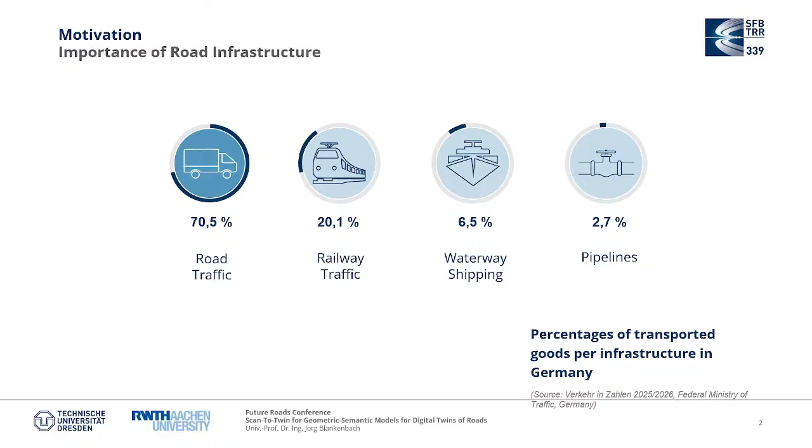transport. And what you can clearly see is that the road outperforms all other modes, railways and waterways, by far for the transport of goods. And that's very important because roads are the backbone of the economy, because the transport of goods is very important for the economy. However, also roads are very important.

They face some challenges. First of all, we have an increase of traffic year by year, causing traffic jams, for example. Also, we have an increasing load, so the vehicles become heavier. This impacts the condition of the road, of course. That means the durability is a problem. Roads are prone to recurring damages. And of course, repairing these damages, maintaining roads needs a lot of resources that are limited and should be used in an efficient way.

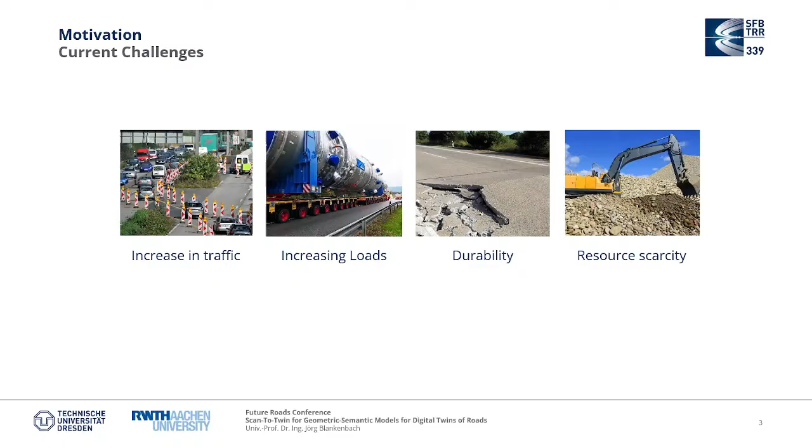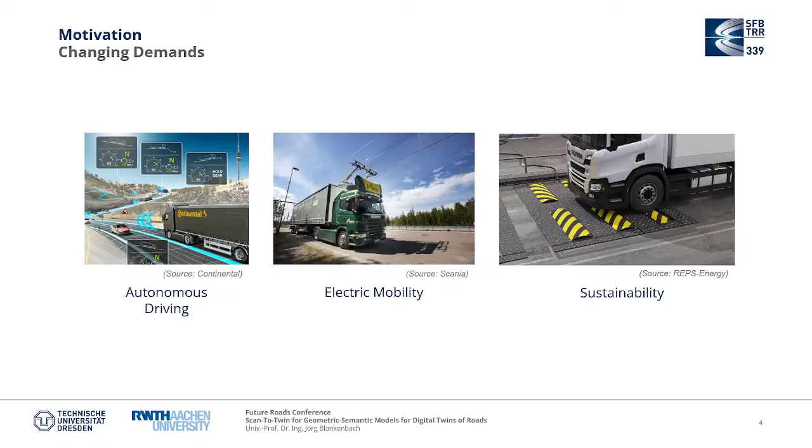However, besides these, let's say, traditional challenges of roads, we have also some new demands. Roads should support autonomous driving, electric mobility in future. And of course, roads should also contribute to sustainability, for example, to energy production.

And this finally leads to the question, how can roads meet all these challenges and future demands and at the same time continue to fulfill their essential role? And our answer to this question is a consequent digitalization of the road systems following the concept of digital twins. Before I go into details, let me first define what we mean by digital twin. We heard already we shouldn't talk too much about digital twins and define what it is.

However, as you know, when it comes to digital twins, there is a different understanding among people of what a digital twin really is. And in our case, I use an official definition, again from the Federal Ministry of Transport in Germany. And it says a digital twin is a virtual representation of the real world system, in our case, the road system. But what's very important, it's a dynamic representation. So it changes over time because the real road also changes over time.

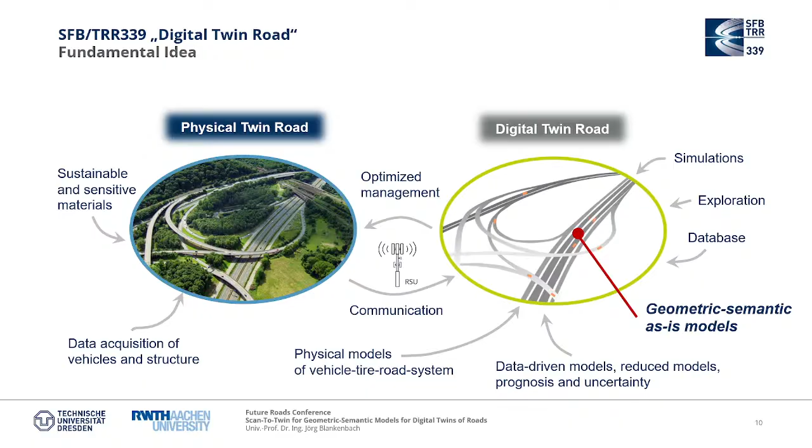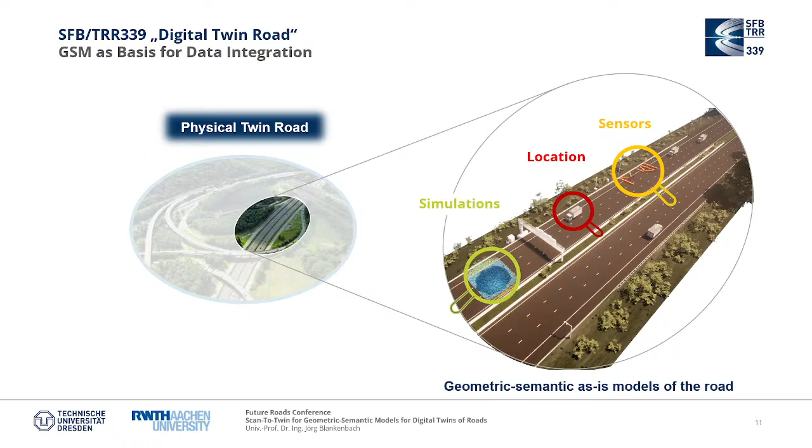One of these models I would like to highlight now, because we think this is a key foundation of a digital twin. This is a geometric-semantic as-is model. Why is this the case? First of all, such a geometric-semantic as-is model is an information model. So we are able to store a lot of information about the geometry, topology, semantics, as well as alphanumeric attributes. But coming back to my definition, it's also very important to integrate further data. So it allows to integrate sensors and sensor data, as well as location-dependent data, like, for example, the position of vehicles. And it's also able to visualize, for example, the results of numerical simulations.

And let me go into a little bit more detail about that. I will start with how to create such a model. And maybe Peter likes this slide, because I know Trimble is also manufacturing some of the technologies seen there, because a digital twin has to be a virtual representation of a real system. And that means it also has to represent the as-is condition of the system. And how do we get the as-is condition? We can use modern reality capturing technologies like laser scanning, drones, or mobile mapping systems, rather than using design data, for example, like plan models or something like that.

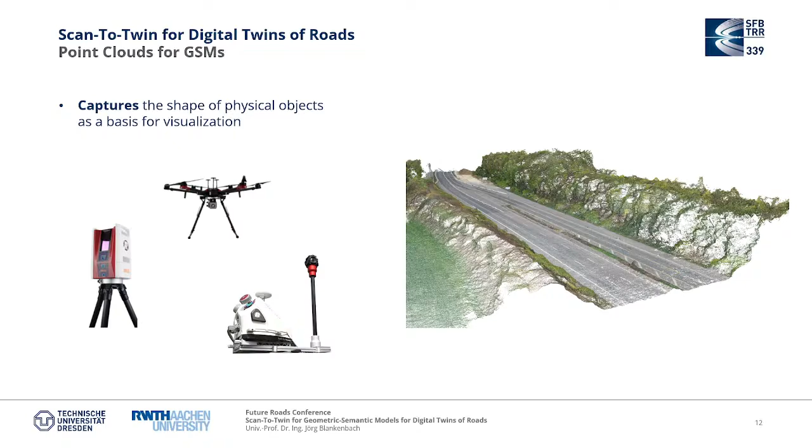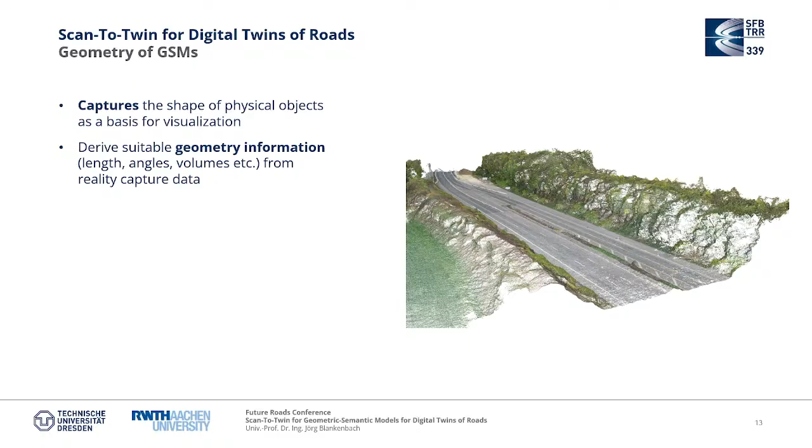And as a result, we have such a high-resolution 3D point cloud, which we can use for visualization purposes, of course. However, these point clouds also include a lot of information, explicitly the geometric information. You can get from these point clouds the shape, the dimension of the road, can measure lengths, angles, volumes, and so on. However, what's also in these models, implicitly, if you look at this point cloud, you can clearly see the roads, road markings, the vegetation, and so on. That means these point clouds also include semantics.

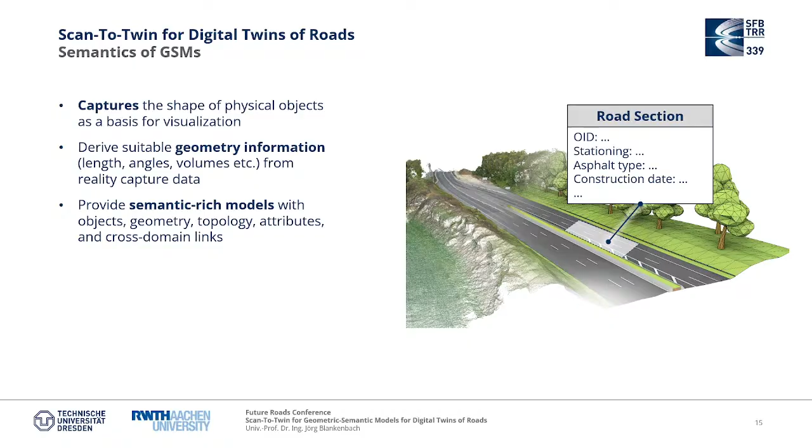And that means what we can do using these point clouds is to create classes and assign to these classes attributes and store, besides the geometry, also some alphanumeric data. And furthermore, and this is very important, you can now use the semantics to connect the classes to further data. For example, to external databases, damage databases, and you can just use the semantics linking the objects to other databases. So it's really the basis for semantic linking.

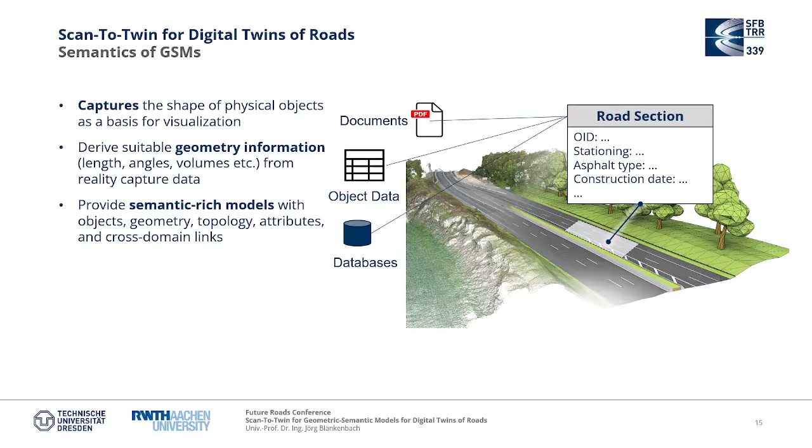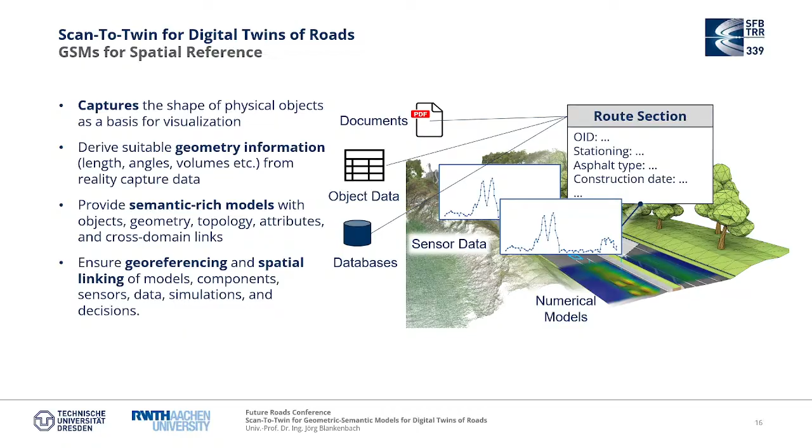However, coming back to the point clouds, the value of the point clouds goes beyond just having geometry and semantics, because point clouds usually are captured in a georeferenced way. And that means the point cloud itself inherits a geospatial reference system, and also the models derived from these point clouds inherit this geospatial reference system. And that makes it possible to also link other data in a spatial way. That means, for example, sensor data or the results of numerical models can be linked to this model just by the location, by the spatial reference.

Okay, I hope this sounds reasonable so far. But the question is now, what do we research? Because deriving such models from point clouds is feasible. However, in practice, the problem is that this is a very cumbersome task, and you need many manual steps to create such models, which makes it costly and time consuming.

So the question is, how can we automate this process? And this is exactly what we are going to research, automating this process. And we call it scan-to-twin. You all know maybe the term scan-to-BIM, and now we call it scan-to-twin because it's more or less the same. However, there are some differences. I will come to that later.

So let me briefly introduce what we do in research. First, we structured the whole process to create such a model, and this results in a multi-step pipeline starting from data capturing, as already shown. The second step then is the semantic segmentation. That means we assign a semantic class to each of the points. Then in the third step, we try to extract the geometry, for example, the center lines, the axis of the road, and both together, semantics and geometry, are then used for creating the model.

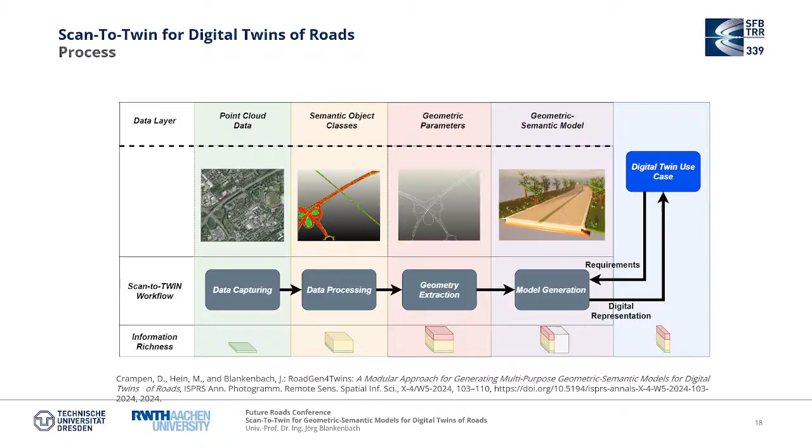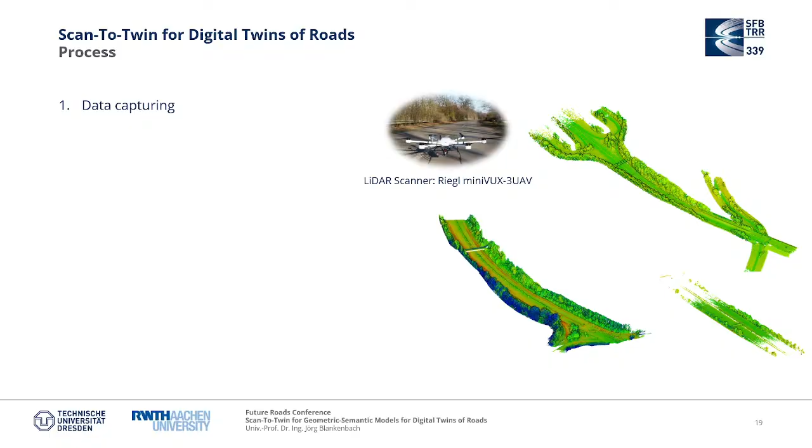Let me give you some more details or impressions from this multi-step pipeline, starting with the data capturing I already mentioned. Therefore, you can use modern reality capturing technologies that emerged in the past years. We, for example, use LiDAR scanners besides airborne laser scanning data, and these drones equipped with a LiDAR scanner enable us to capture data from the roads very efficiently. And as a result, we have such point clouds like shown here, high resolution point clouds that can be used for the next step.

And in the next step then, it's about the semantic segmentation. As you can see, now the point cloud becomes colored. That means in this step, each point is assigned to a semantic class, and therefore we have developed some algorithms, a coarse-grained and a fine-grained semantic segmentation using also AI to assign these classes to each point.

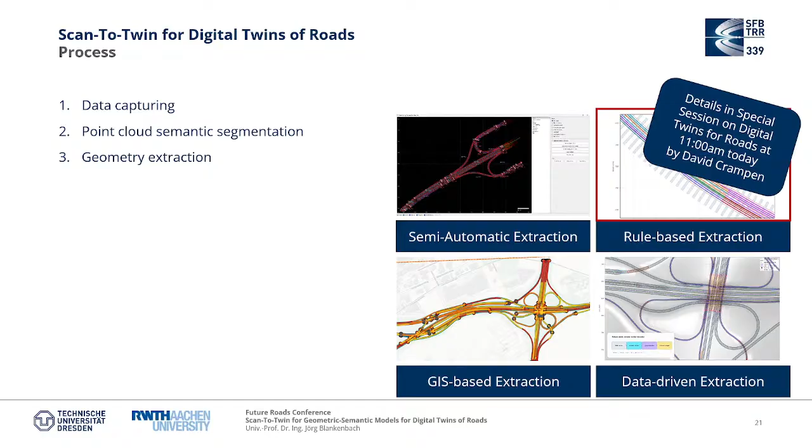Third step, then the geometry extraction. We also developed different approaches, different methods and algorithms for doing so, from semi-automatic extraction to data-driven, and we compared them, of course. But in this case, I don't want to go into much detail because we will have a presentation in the next session. It's a special session on digital twins given by David Crampen, and he will explain especially how this rule-based geometry extraction works.

Okay, and then finally, creation of the model. And as I already mentioned, it's very important to consider the use case. And therefore, on the left-hand side, we developed a multi-LOD concept. That means we split up, or we distinguish between the geometry and the semantics. And for each, we have different granularities. And this allows us to create models at the end that have different levels of detail.

And this enables us to, it's not working well, but this enables us to support different use cases from micro scale to macro scale. That means from pavement monitoring, which is more or less on the material side, up to driving simulations, because all of these use cases have different requirements for the models themselves, and this can be described by this LOD concept.

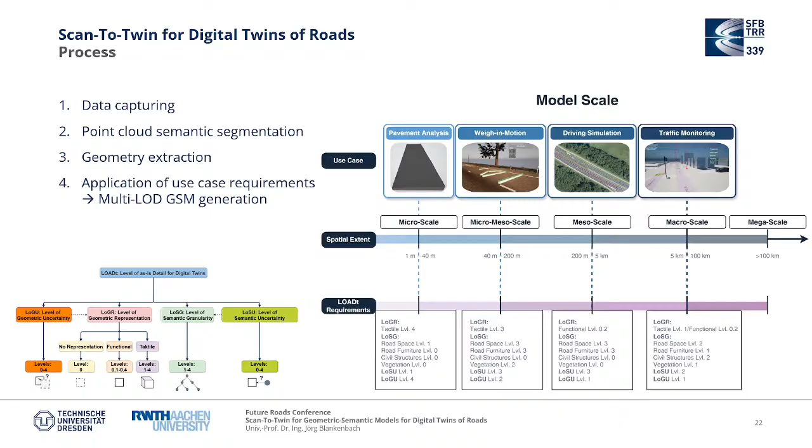Okay, I said it's a basic research project, that's true. However, for practice, it's also important that we can export these models in some standard formats or standard data models, like, for example, IFC from BIM, or CityGML from geospatial modeling, or Lanelet. And so we also investigate how we can export the models in these formats to really support different applications.

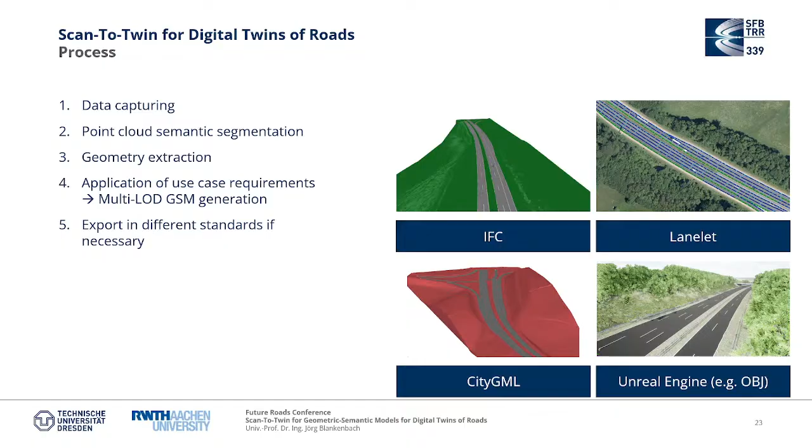Because to show that it really works, we prepared a so-called showcase. That means it shows how our geometric-semantic model can be used, besides other data, to support a specific use case. And in this case, it's a use case about pavement monitoring.

And we integrated data from further sub-projects, starting with vehicle data. We have one sub-project that uses data from vehicles, from dampers, from the tires, to sense the condition of the road, for example. We have also a project dealing with pavement data. So we have installed a weigh-in-motion system in a highway, giving us data about the loads of the vehicles. Then in the middle, you can see our GSM, our geometric-semantic model.

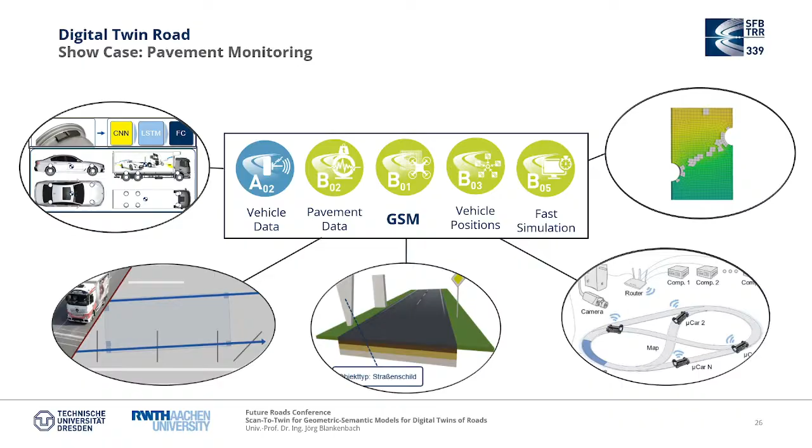Another project deals with vehicle position. So it's about tracking of vehicles and position estimation. All this data is also integrated. And last but not least, we have a couple of projects dealing with fast simulation, data-driven simulations, in order to do real-time simulation, in this case of the pavement response, based on the data from the vehicles and the geometry from the geometric-semantic model.

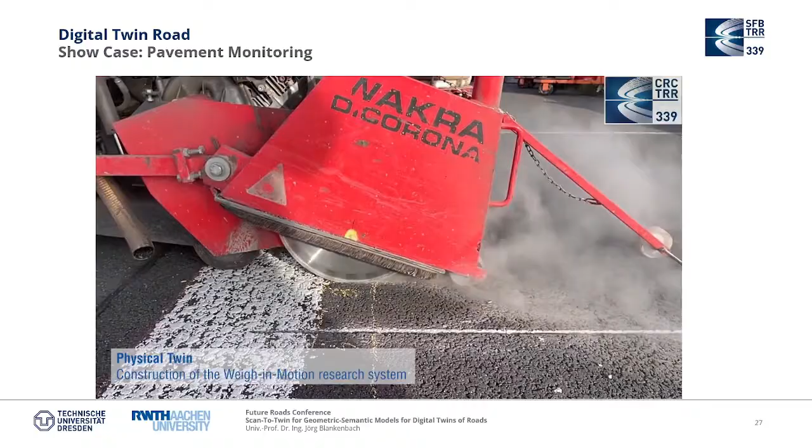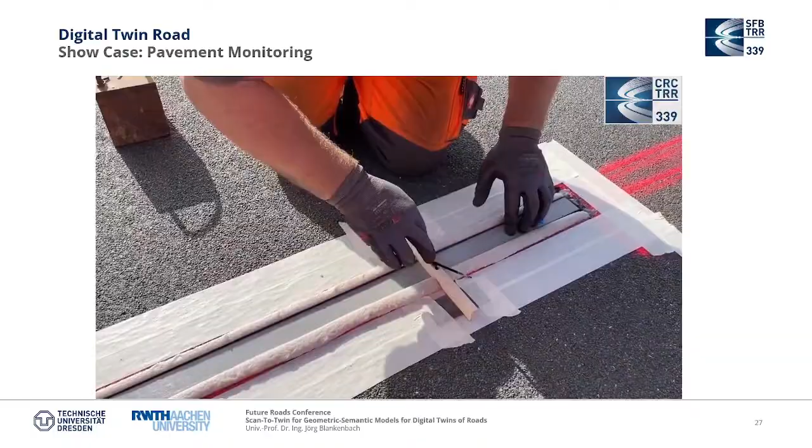Okay, and how this looks, we have prepared a small video showing what we have done so far. It starts with the physical side. As mentioned, we had the opportunity to install a weigh-in-motion system on a German highway. So here you can see how the system was installed. These are the sensor bars of this weigh-in-motion system.

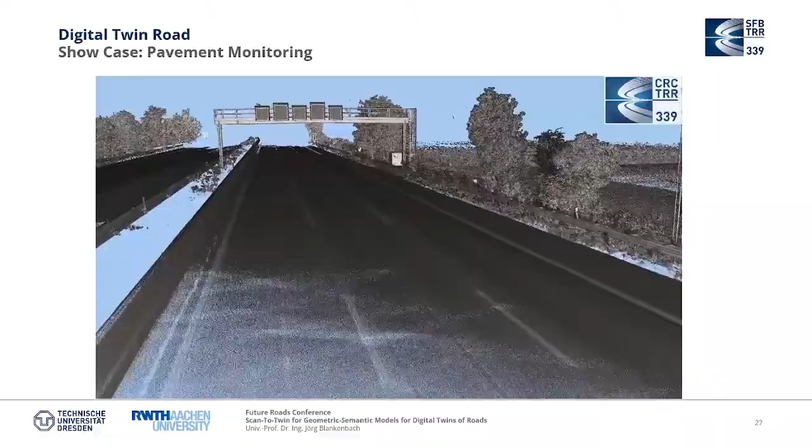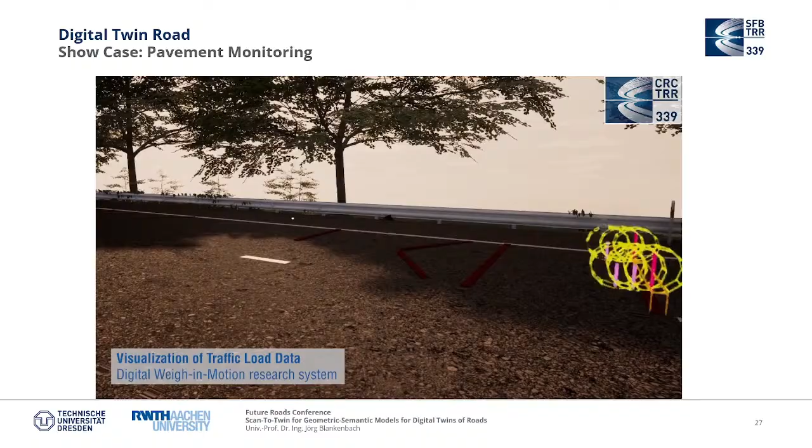We then also scanned the whole scene, this highway section, with a terrestrial laser scanner, and this 3D point cloud is then the basis for our geometric-semantic model. We also captured a lot of data. Of course, we captured first data with our weigh-in-motion system. Here you can see again the 10 sensor bars of the weigh-in-motion system on the German highway. And this is how it looks in the geometric-semantic model, the model itself, but also the sensor bars. And you can see the tires of the vehicles that are also modeled.

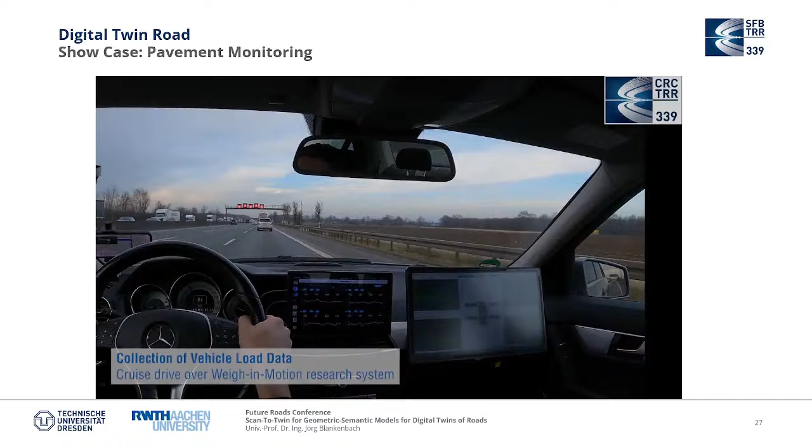And we also captured data by vehicles. So by these sensors of vehicles, you can see it's a Mercedes-Benz, so it's a German project, so a German car. It's quite clear. And we use this data also to get some information about the condition of the road. In this case, they drive the same highway section where we have the weigh-in-motion system installed.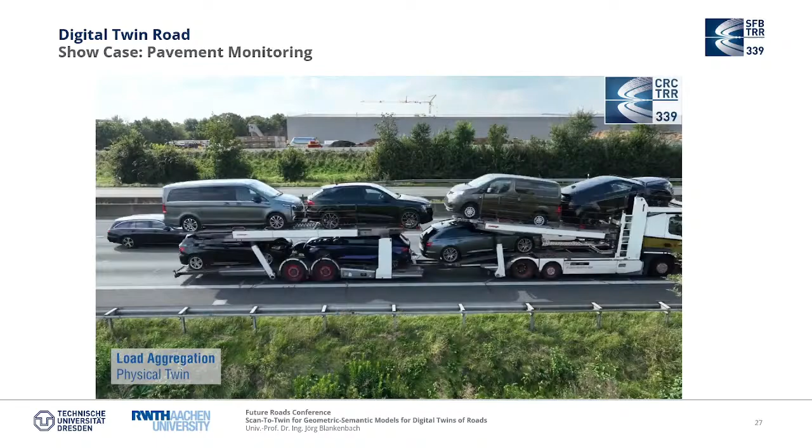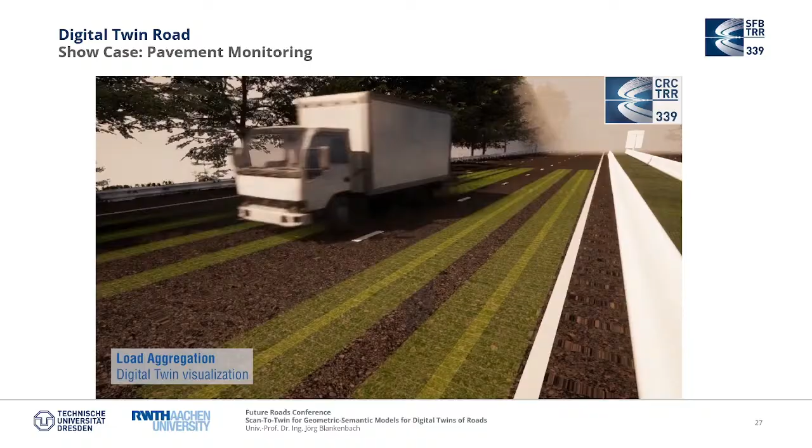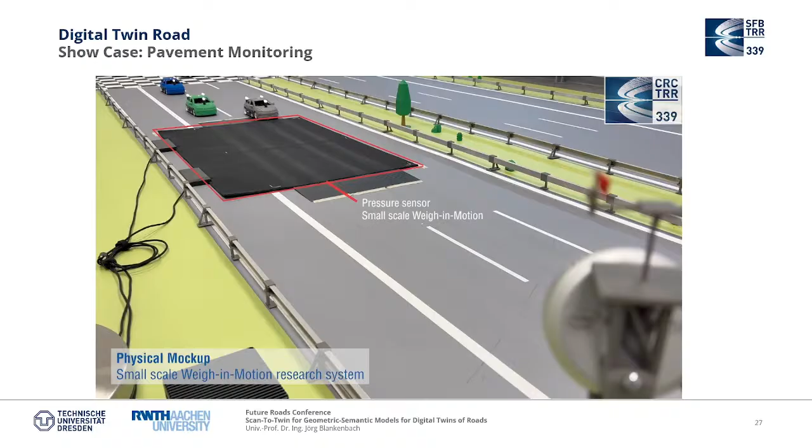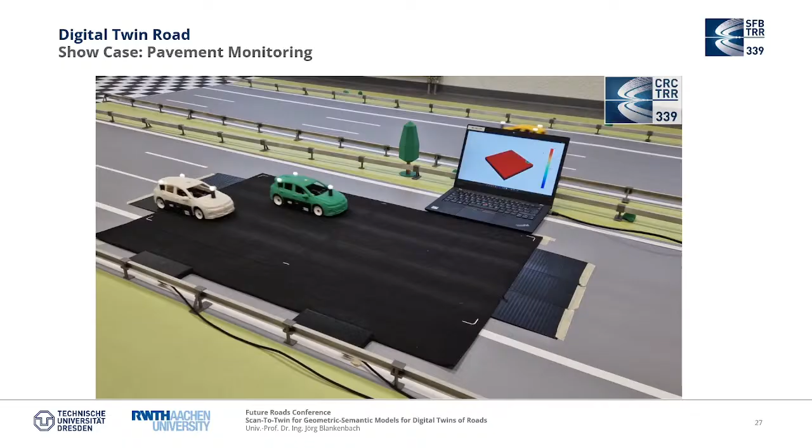What can we do with that data? Of course, we can first of all analyze the loads and create these load tracks of different vehicles, so you know what is the load at a specific point in the model. And to do better, we also created a kind of physical lab model of the same highway section. Here you see the small cars, and in the middle that black pattern, this is a pressure mat. So it's the same as the weigh-in-motion system in the real system, here in the model system, and it helps us to do more research on it.

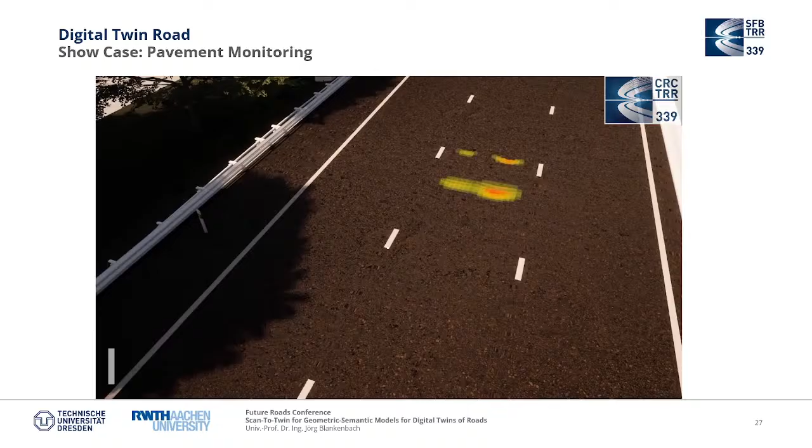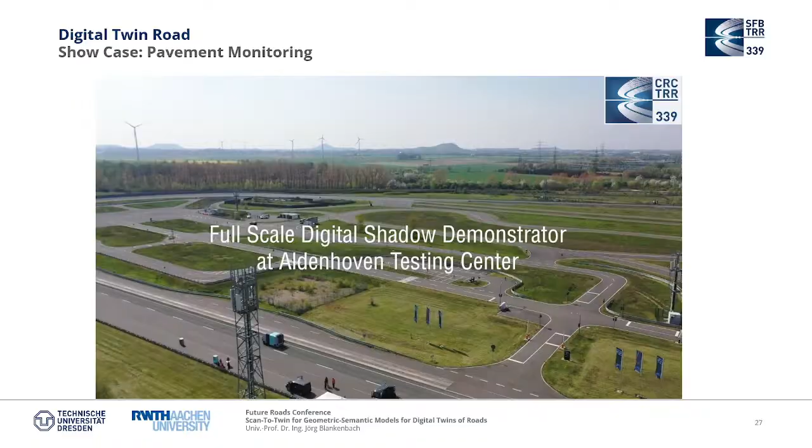And here you can see the vehicles and the position estimation. And this is very interesting what you see here. This is the result of a finite element model. It was a little bit quick, but I go on, because we have a surrogate model that simulates what is the impact, the deformation inside of the road based on the sensor data. And this is done in real time and can be depicted based on the roads.

And at the end, what you could see, we do it now more or less in the lab or on this highway section, but in the next phase, the goal is to do this also on a test track near Aachen, the Aldenhoven Testing Center, and we'll prepare a whole track, a whole road with different sensors for going on to develop our digital twin.

Okay, so I hope I'm in time more or less. Because I come to the end of my presentation, I hope I could demonstrate what we do in our project and especially what is the role of such geometric-semantic as-is models. And with that, thank you for your attention.

So now we have time for the questions. Who has questions?

Thanks for the amazing talk. I was wondering, with the different levels of detail, you went from the micro scale to the meso, or the macro. I was wondering, what size are the files then? If you've got perhaps